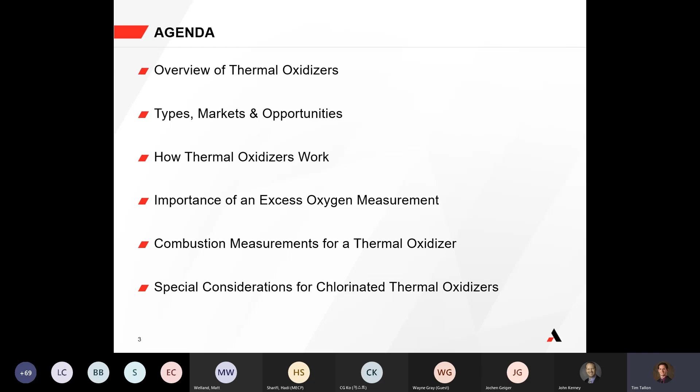Again, the focus of today's conversation will be reliable combustion control for thermal oxidizers. Let's talk a bit about the agenda for today. We'll talk about how thermal oxidizers work, how they're different than some other pieces of fired equipment you might be familiar with, and different markets that thermal oxidizers exist in. We'll also talk about the importance of the oxygen measurement, specifically the excess oxygen measurement - a pretty critical measurement for thermal oxidizers. We'll talk about relevant combustion measurements, and then some considerations around chlorinated applications.

So to start off, why do thermal oxidizers even exist? Well, they exist for the purpose of emission control, to reduce air pollution, by burning the volatile organic compounds (VOCs) or hazardous air pollutants (HAPs) in the waste stream. They do that specifically through some type of combustion or high temperature thermal oxidation process - hence the term thermal oxidation: high temperatures, and oxidation through reaction with oxygen.

Thermal oxidizers differ from the conventional term of incinerators because they're more specific. Thermal oxidizers burn only gases and liquids, whereas incinerators can burn solids and other types of solid waste. A thermal oxidizer is much more specially designed for these gases and liquids, which is why we're talking specifically about thermal oxidizers, as opposed to incinerators, which could burn anything and have any type of variable waste stream.

When we think about measurement objectives, it's always important to think about safety, so monitoring for safe and complete combustion. We want to make sure you're operating with complete combustion as opposed to unburnt waste or other forms of incomplete combustion. It's absolutely critical to have the correct air-fuel ratio, making sure you have enough air to fully oxidize any of the waste gas directed to the thermal oxidizer. Also, having sufficient oxygen is critical for high destruction removal efficiencies. We'll talk about DRE throughout this presentation, and we'll also cover this air to fuel ratio a couple of times during the presentation.

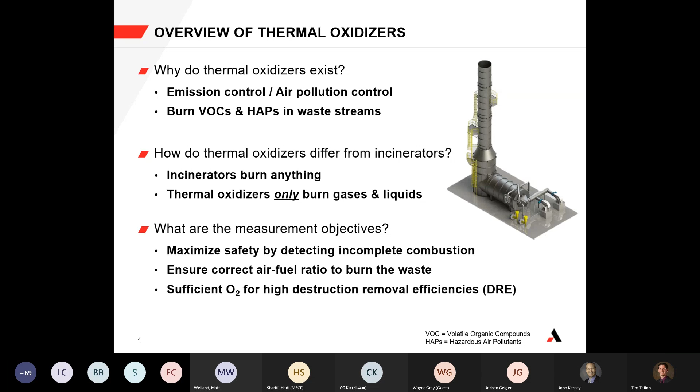We'll talk directly about that towards more the middle of this presentation.

Some of you may be very familiar with fired equipment, specifically fired heaters. Fired heaters have a very specific function, and thermal oxidizers have a very specific function, so let's talk about that. A fired heater is designed specifically to heat a process fluid. You have a whole bunch of tubes filled with some type of fluid that you want to heat up for later in your process. You'll most often see multiple burners firing natural gas, operating at relatively high temperatures, with a radiant section for the tubes to be heated from both the heat of the flame and the radiant light from the flame. There's some type of transition zone to the convective section, and then out to the stack. That's primarily a fired heater, purpose-designed around heating some type of process fluid.

Now, a thermal oxidizer, on the other hand, is designed...

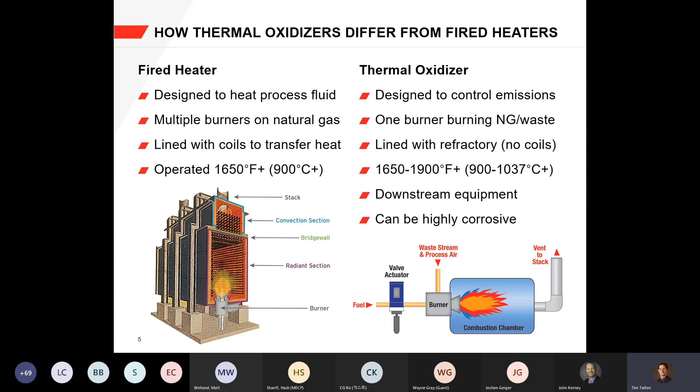Now, when we think about where thermal oxidizers exist, I want to be clear that they exist across industries. In a refinery there's gas thermal oxidizers, catalytic crackers, and a lot of different applications throughout chemical plants. Anything that has a waste gas byproduct, whether that be a vent stream, a chlorinated hydrocarbon waste stream, a nitrogen-bearing compound, or even wastewater like acrylonitrile, all of those different types of waste streams can be directed to a thermal oxidizer to thermally oxidize and eliminate the waste compounds before going to atmosphere.

The whole purpose of a thermal oxidizer is to eliminate hazardous waste through incineration and thermal oxidation, and you'll see that throughout the chemical industry. But in addition, you also see it in pulp and paper mills through non-condensable gas emissions, asphalt plants, landfill gas, carbon black production, and pharmaceuticals. So think about where your process might have some type of waste stream, and chances are it may very likely be incinerated, especially if it's high concentrations. It may be thermally oxidized through a thermal oxidizer. So a lot of applications across industries.

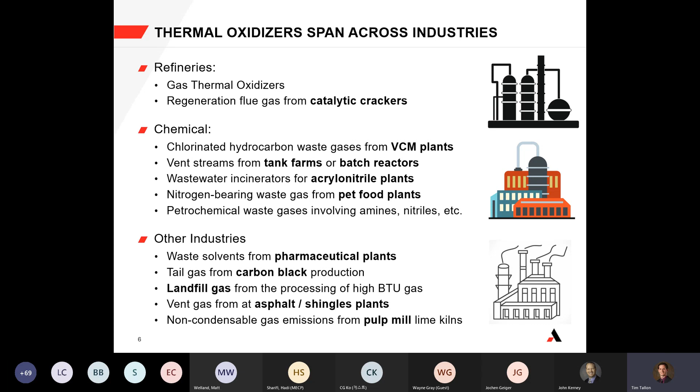Now I want to take a moment to talk about the waste gas itself, because the waste gas drives much of the design of the thermal oxidizer. In a general sense, there are two scenarios: there's the contaminated air scenario, and then there's a highly more combustible waste stream compound process stream.

For contaminated air, it has trace amounts of contaminants. The airstream itself may not be combustible or have any type of combustible value, primarily inert, and it most likely has sufficient oxygen to mix with the waste gas compounds for oxidation. So typically a contaminated airstream does not require an oxygen measurement if it has high enough oxygen concentration. If it's just generally air, 21% oxygen, those types of devices don't necessarily need an oxygen measurement because they have such high amounts of oxygen in that process stream.

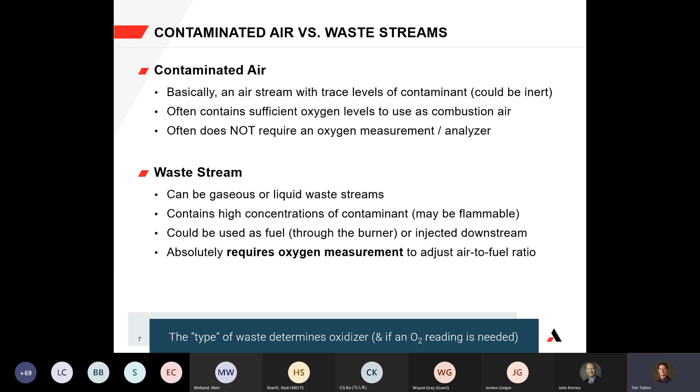But for a standard waste gas stream, whether gaseous or liquid, you could potentially have very high concentrations of contaminant, so much so that it could actually be flammable. In those cases, if it is flammable, you could use it as fuel and inject it through the burner for the initial injection into the combustion chamber. Or if it's more inert, you can also inject it downstream through a separate nozzle. But in those cases, you would absolutely require an oxygen measurement so that you can control the proper air to fuel ratio at the burner and with secondary air, which we'll talk about more. It really depends on the type of waste you're looking to thermally oxidize in order to have the right design to meet that waste removal.

Now, if we talk about contaminated airstreams, generally there are two different types of thermal oxidizers. There's a couple of exceptions, there could be more, but generally what you'll see for a vast majority of contaminated air applications is a regenerative thermal oxidizer. Generally in these cases, you could have 2 media beds, up to 3 media beds, or even more. But basically it has a special valve configuration that alternates where the waste gas is injected.

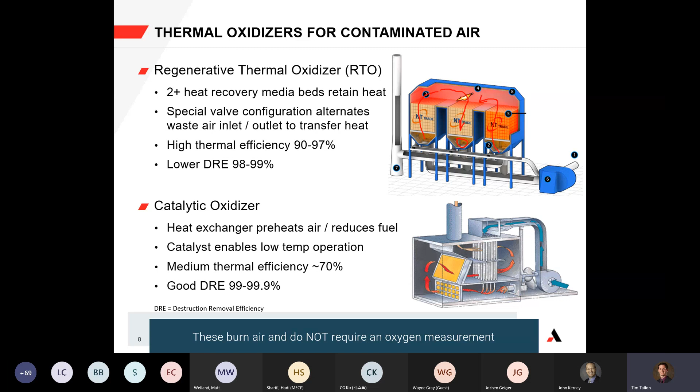Now, where we're going to spend most of the focus of today's presentation is around direct fired and recuperative thermal oxidizers. The thing about them is they can be in many different configurations - single stage, multi-stage, depending on what the design is. Designs for lower NOx, designed for different waste streams.

You can introduce the waste gas through the burner or downstream through a nozzle like I talked about before. Basically, it's able to handle waste liquids, waste gases, and they're highly customized. When I used to design thermal oxidizers, they were very highly customized depending on the size and volume of waste gas, the components in it, and very high destruction removal efficiencies. I mean, we're talking 99.99% destruction removal efficiencies.

So we call that 4 nines destruction, very high destruction removal efficiency. And then with a recuperative thermal oxidizer, it's the same as direct fired, except it includes some type of heat recovery. Now that could be - we'll talk about that later as well - but that could be a boiler, that could be a waste heat exchanger, it really depends on what you're trying to achieve.

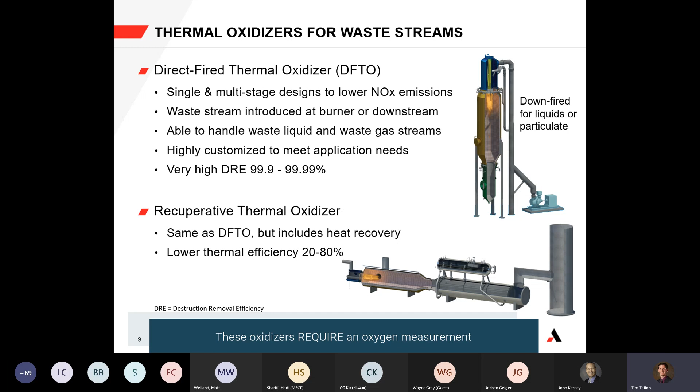But let's talk about some of the primary elements of a thermal oxidizer. Every thermal oxidizer should have these components, especially the direct fired ones. So everyone will have a burner of some sort, and that burner can fire fuel, and if the waste gas is combustible enough, it can go through the burner as well.

The burner can be fired horizontally. In both of these cases it's fired horizontally, but it can also be vertically up-fired, vertically down-fired. It really depends on what you're trying to incinerate.

You could also, depending on the waste gas, inject downstream as well. So it's very possible to inject waste downstream, depending on the waste compound itself.

You also have a combustion chamber. That combustion chamber operates hot, so 1600 degrees Fahrenheit or more, 900 degrees Celsius or higher. And then you also have an oxygen measurement towards the outlet of the combustion chamber, as well as a thermocouple.

These are absolutely critical for control. We'll talk about this later, but you'll have them right towards the outlet of the oxidizer chamber, just to make sure that you have sufficient oxygen to control your air inlets.

You also have some type of PLC or burner management system to control the burner and the air-to-fuel ratios, and then also a fuel skid to control the fuel before you go into the oxidizer. So some type of control valve scenario, a fuel skid, and then some type of stack. That's the general overview of the elements of a thermal oxidizer, just at the bare minimum.

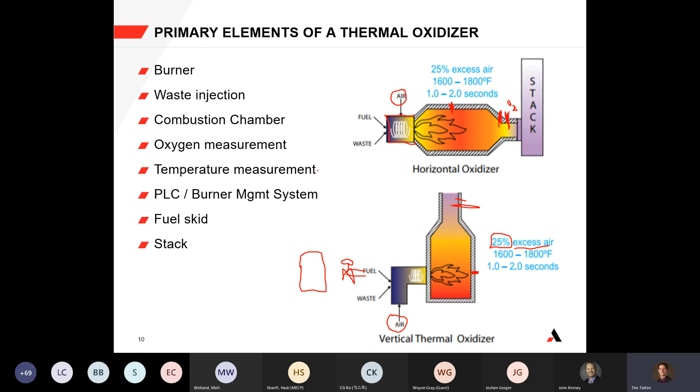One thing I want to make clear is that being that thermal oxidizers are so customized to the application, your application may have very specific elements added to it. So if you have a nitrogen-bearing compound, you could have a reducing chamber, which I'll show you in a future slide, in order to remove nitrogen-bearing compounds.

If your burner is generally above 10 million BTUs per hour, you would also consider some type of waste heat boiler for heat recovery. Alternatively, you could consider a heat exchanger depending on whether or not it makes sense to preheat your waste gas, and if that impacts your oxidizer, you'd have to consider that. There's also the option for heat exchangers for heat recovery, or flue gas recirculation for cooling the air, for additional options for cooling the flame and lowering NOx.

Depending on the size of your thermal oxidizer, you may also consider an induced draft air fan. There may also be one at the outlet, to pull the full suction of the products through to the stack. So you might also have an induced draft air fan right before the stack, to pull all the products of combustion through the equipment before it goes to the stack.

And if you have particulate or chlorinated compounds, you might need additional equipment. Say you have chlorine or sulfurs, you might have a spray dryer absorber or a scrubber mist eliminator. If you have some type of particulate, you might consider an electrostatic precipitator or baghouse. And if NOx is a concern downstream, you might also have SNCR, selective non-catalytic reduction, or selective catalytic reduction at the back end. So different ways to approach a thermal oxidizer, a lot of application-specific elements to consider.

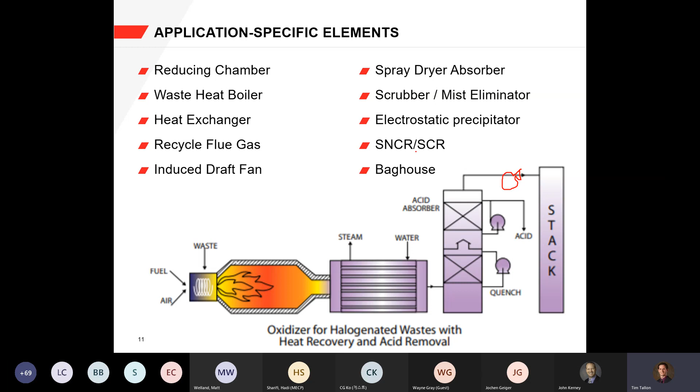Now, a thermal oxidizer operates on what we call the 3 T's of oxidation. Obviously the objective of a thermal oxidizer is to fully remove, eliminate, and destroy the waste gases and waste compounds in the waste stream. So in order to do that, you need the 3 T's of oxidation: temperature, time, and turbulence.

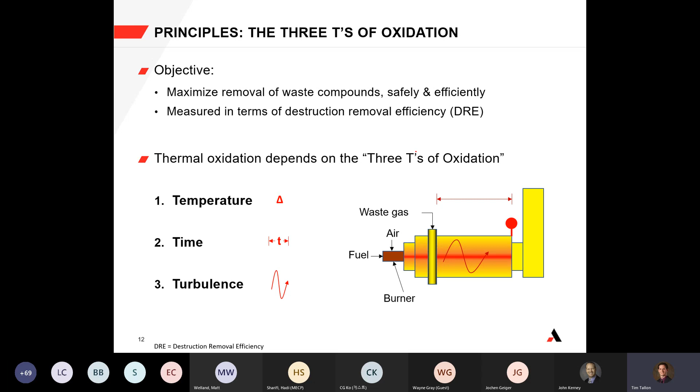Let's go into that. For temperature, you need to make sure that you'll have a combustion chamber that operates typically between 1650 degrees Fahrenheit, 900 degrees Celsius, or higher, in order to operate in hot enough conditions. But that hot condition is dependent directly on the auto ignition temperatures of the constituents and compounds within the waste stream.

So your combustion chamber temperature is dictated by the auto ignition temperature. That's the first T: you need to have sufficient temperature to fully unlock that auto ignition temperature reaction. That's the first thing, auto ignition.

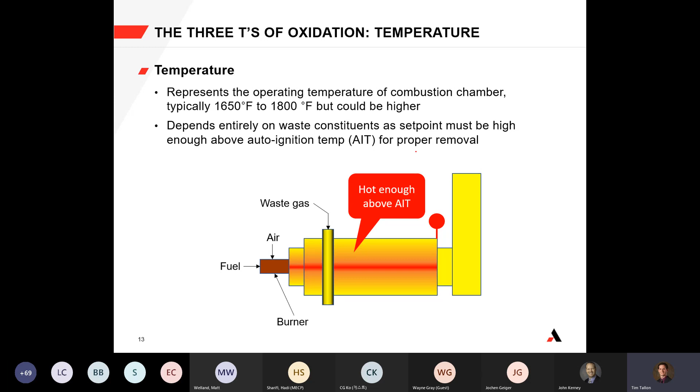Now the second thing, time. When I say time, you need sufficient volume of chamber in order to fully oxidize the waste compounds. This could be half a second. Generally it's about 1 second residence time for destruction, but that's a general rule of thumb. You need sufficient residence time for those compounds at high enough temperature in order to fully oxidize them. So generally, the longer the chamber, the higher destruction removal efficiency you'll have. That's the second T, residence time.

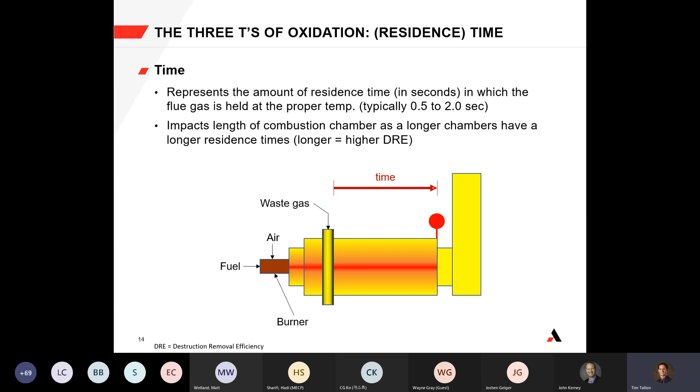And the last of the 3 T's of oxidation is turbulence. Turbulence specifically refers to the mixing and velocities within the combustion chamber, and ultimately turbulence with oxygen. It's 100% critical to have sufficient oxygen mixed with the waste gas at high temperature with enough time in order to fully oxidize it. So it is absolutely important to have sufficient oxygen with proper mixing within the chamber. That mixing can be achieved by the spin of the burner flame or the injection of the waste gas. A lot of different special items there.

So we should call it the 3 T's with O2, as you say. Typically we talk about the 3 T's, but you are absolutely right - we have to call it the 3 T's plus the O, or whatever we want to call it. That's a good point. They call it the 3 T's of oxidation, but you need oxygen too.

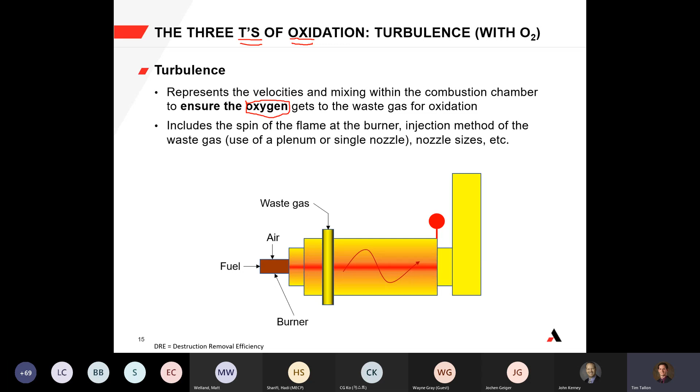Yeah, the oxidation part, and it's different from burner to burner also about the turbulence. Turbulence is something you can't measure - it comes in from design. All 3 T's come in from design. Only the oxygen and the temperature are something you measure, but only the oxygen is the one you can control. So we want to emphasize on the O2. It's absolutely critical - if you have all 3 T's without oxygen, you wouldn't get full oxidation. You might have some other concerns. But great point there.

Now for basic operation, we'll go through this very briefly. When you think about the basic operation, a simple thermal oxidizer would have some type of burner flame. It could have a flame tip where the flame is anchored, or it could have a refractory baffle that the flame sits on. But in either case, there's a flame - that's part of the thermal oxidation process.

With that, you have to introduce waste in some way, shape, or form. The waste can be injected through the burner if it is flammable, or if it's inert, it could be injected through a nozzle separately. So in this case it could be injected through a nozzle, designed properly with sufficient turbulence to interact with the flame.

But once you have that, you may need additional air, because you can't put all of your air through the burner in some cases. So you might need additional secondary air to achieve a 2 to 3% excess oxygen level. And obviously you also need some type of thermocouple at the end to measure, to make sure you have proper temperature within your combustion chamber. So the excess oxygen measurement adjusts your secondary air, which we'll talk about later. And then you operate sufficiently at high enough temperatures within your combustion chamber before it vents out to atmosphere. Just like we talked about, the 3 T's of oxidation. And then again, you may need additional equipment.

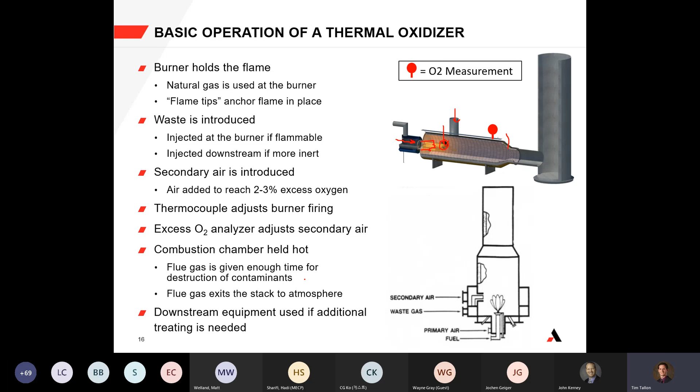So let's talk a little bit about a multi-stage thermal oxidizer. I won't go into too much detail, but I do want to make it clear that a multi-stage thermal oxidizer would be used if you have nitrogen-bearing compounds - say you're burning amines, for example, or some type of acrylonitrile. It really depends, a lot of different types of applications. In those cases, you operate fuel-rich and substoichiometrically, starving the flame of oxygen, generally 70 to 90% stoichiometry, at very high temperatures, 2000 to 2400 degrees Fahrenheit, for 1 to 2 seconds residence time.

And with that, the burner is designed specifically for this reducing environment. The chamber is designed for these extremely high temperatures. What you're doing in this reducing chamber is turning those nitrogen-bearing compounds, starving it of oxygen, so that any nitrogen present forms the diatomic nitrogen molecule as opposed to NOx. So the whole point of a reducing chamber is this diatomic nitrogen. Now, in a multi-stage thermal oxidizer, you would also need some type of quench section, because you can't just emit this reducing gas to our atmosphere - you need to do something else with it.

So generally, it's followed by a quench section, where you would add additional air and additional water, especially if there's a high reaction after the oxidation air. You want to avoid creating additional hotspots so that you don't recreate NOx. In either case, you add air, potentially additional water, and then you have your oxidizing chamber. This is the exact oxidizing chamber we were talking about before, where you control it at high temperature so that you can thermally oxidize the remaining waste gas before it goes through the rest of the system and out the stack.

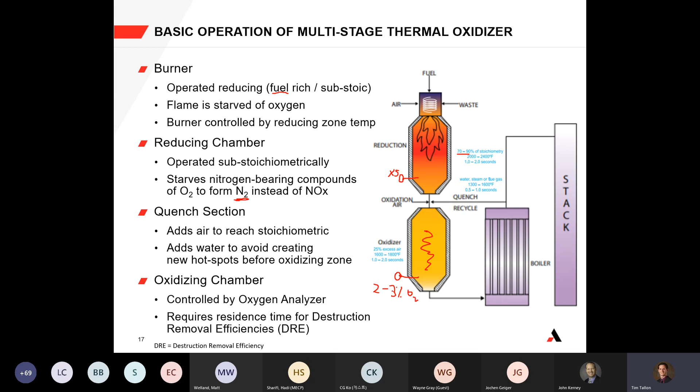So like we were talking about before, the downstream equipment can tell you a lot, and in particular, if you have chlorine, for example, you would need some type of spray dryer absorber or some type of Venturi scrubber like you see here, or some type of packed tower. All of those are different ways that you could handle corrosives like chlorine or sulfur. If you have particulate, you may need a baghouse of some sort with dropout zones and dust collectors to accumulate that particulate before going to atmosphere. You may also need an electrostatic precipitator or a cyclonic separator like you can see here, depending on what else is in your waste stream.

You could also consider high pressure thermal oxidizers, which are not very typical, but in those cases they would have some type of pressure vessel design. A typical thermal oxidizer does not see high pressures because it ultimately vents to atmosphere. That being said, you can also have other designs, like we saw some examples where the waste was fired downward. Waste liquids and waste water would both be vertically down fired. Even in some cases, if it had particulate, it could also be vertically down fired, so it could all accumulate at the bottom through a dust collector or dropout zone.

And then finally, you could also consider different designs, whether you have nitrogen-bearing compounds, whether that be a multi-stage oxidizer or selective catalytic reduction or selective non-catalytic reduction. But the downstream equipment can really tell you a lot about what's in your process and what's being incinerated.

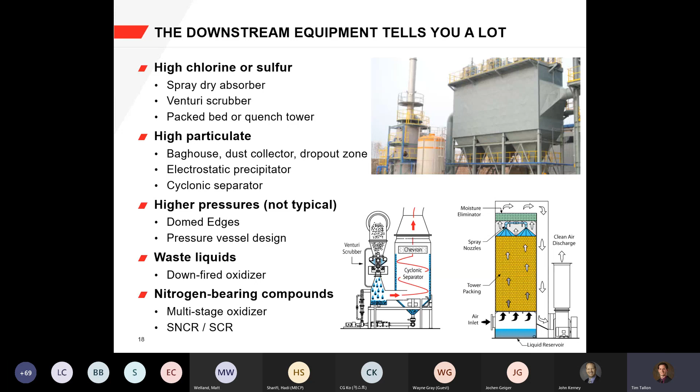Now, we talked a little bit about this, and I know there were some questions already about the excess oxygen measurement. But this is a really rough piping and instrumentation diagram on a thermal oxidizer. Very rough. I made it myself.

So if you think about it, your waste gas is either introduced through the burner or downstream. You have your flame here, but how do you control it? Your thermocouple controls the fuel gas, the fuel control valve - the fuel that goes to the burner tells you how much additional fuel you're going to add. That's all dictated by the temperature. So if the temperature decreases, you'll increase your burner. You'll open your fuel control valve, and that'll introduce to the chamber, so that you get back up to temperature. If it's too high of temperature, you obviously cut back on your fuel control valve.

But when you think about the excess oxygen measurement, that actually controls your secondary air. You want to make sure that you have enough air and oxygen present so that you have 2 to 3% excess on the outlet. In most cases you can't put all the air through the burner, so the only way you can really do that is by having an additional secondary airstream - the primary being the one going to the burner, the secondary being injected downstream. This air ultimately is controlled by the oxygen measurement. So if you're getting too low of oxygen, excess oxygen level, you will open up that valve, increase the burner, increase the blower capacity, and put more air into the system so that you have sufficient air. So it's very important to have this excess oxygen measurement.

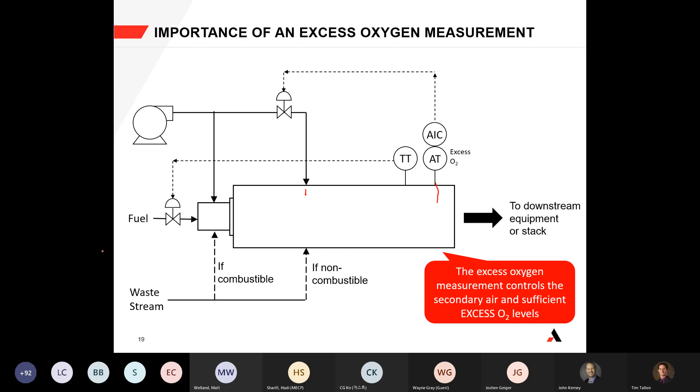Thank you, Jochen. Yeah, that's why I'm stressing the importance of the excess oxygen measurement, because the only way you can really straightforwardly correlate to the air to fuel ratio is through this excess oxygen measurement.

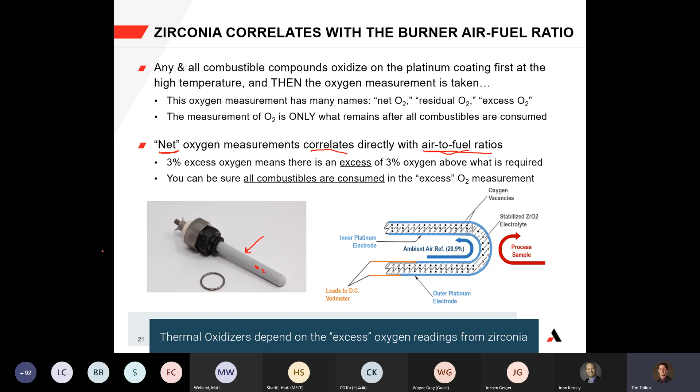Good point. And as far as it comes to a thermal oxidizer, considerations around a thermal oxidizer are that it can have very variable waste composition. It can have massive fluctuations. In some cases it can go from partially flammable to extremely flammable. It could have changes in composition from different compounds, concentrations. There's a lot of different fluctuations a thermal oxidizer can see.

So the ability to very quickly detect low excess oxygen levels is important so that you can quickly respond and adjust that secondary air connection. Ultimately, the destruction removal efficiency depends on the excess oxygen level. The only way you can have proper destruction removal, 99% removal of the waste gas, is through the 2 to 3% excess oxygen with that time, temperature, and turbulence.

And again, because of a key point you just made, Tim, it's another point for zirconia. It has unbelievable flexibility when composition changes. On optical systems, you have to somehow adjust your system for the composition. On extractive systems, you have to modify your sampling system depending on the composition, depending on the state of your sample. With zirconia, it's a kind of in situ measurement. We call it close coupled extractive, but it works under all the different working conditions of the oxidizer, of the reducing chamber. So it offers wide flexibility, especially for this application.

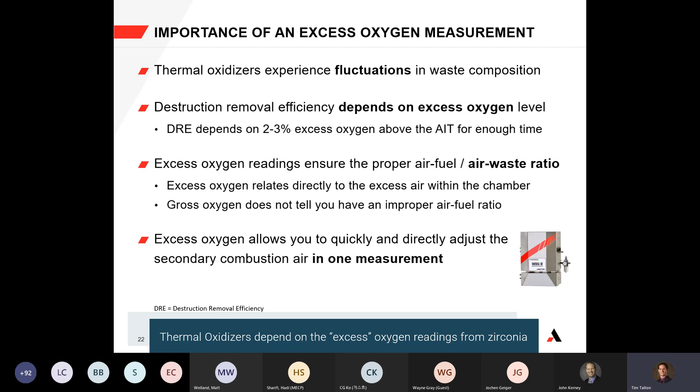Thank you, Jochen. So that flexibility really plays into the fact that it allows you to control your secondary combustion air with just one measurement, the excess oxygen measurement. So with that, where would you install it? I know we talked a little about the reducing chamber with an excess fuel design of a zirconia analyzer, but really, if you're thinking about the oxidizing chamber, you would locate that downstream, right at the outlet of the combustion chamber. And again, why do you do that? The whole purpose is to monitor the excess oxygen level to control your secondary air.

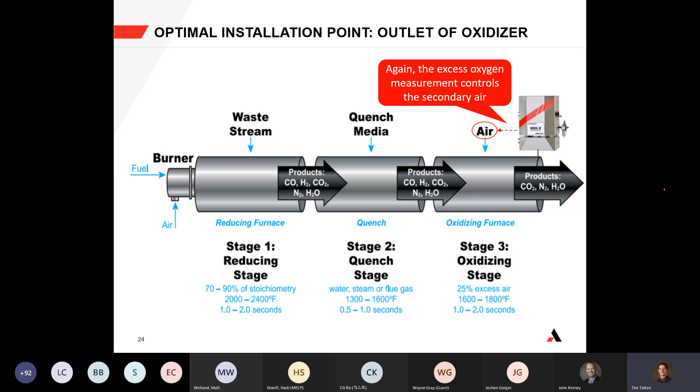When you think about the measurements for a thermal oxidizer, it's absolutely critical to measure excess oxygen for the secondary air control. That relates to your air to fuel, air to waste ratios, making sure you have sufficient air oxygen present for full destruction removal efficiency, and also responding to any unburnt waste. It's very important that you have the ability to detect unburnt waste, and that's why it's an excess reading, because it's detecting the oxygen after everything else is consumed. So that's just something to point out.

My most favorite topic, combustible detector. Let's not confuse this, and as I mentioned earlier, we will do a separate seminar for that. Combustible is something different than CO. CO measures CO, combustibles measures combustibles. And combustibles is CO plus hydrogen. CO is only CO. I can't repeat that often enough, so be sure we'll do something separate for that.

Right. So I know we haven't talked about it directly in this presentation as part of a combustibles detector, but a combustibles detector could allow you additional monitoring for combustible breakthroughs. Like Jochen pointed out, we can certainly talk about that in the next presentation. But for this, I want to make it clear, for reliable control, you absolutely need to think about how you measure that oxygen. As far as combustible detection, combustibles provide you additional information if you start to get a low oxygen reading. Combustibles can tell you well, is that because of incomplete combustion, and what are your operating limits?

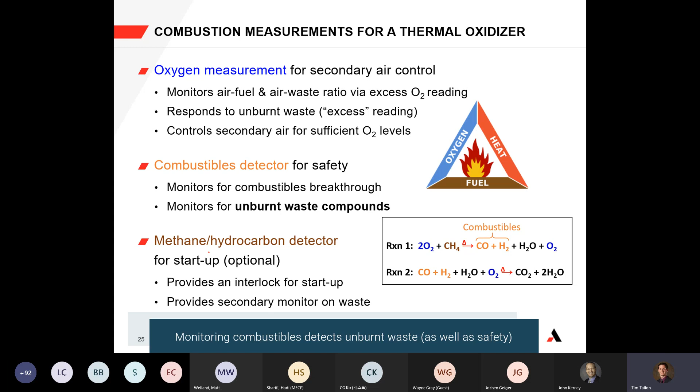For highly corrosive applications, you need to think about the analyzer as well. We had a customer in the past in a chemical plant manufacturing chlorine and chlorinated compounds like PVC and vinyl chloride monomer. They had a situation where the thermal oxidizers they were receiving were designed with less expensive 316 stainless steel versions of the combustion analyzer in this highly corrosive application. What they were seeing was that hydrochloric acid from the process and from the products of combustion were attacking the wetted parts of the oxygen analyzer, inevitably causing leaks, which are hard to find within the analyzer tubing, ultimately causing concerns with reliability and safety.

Our specific customer had to replace their stainless steel analyzer every 6 months. It wasn't until we got hold of this information that we worked together with them and identified a Hastelloy C option. Many years ago we had the Thermox WDG-IV flue gas analyzer, and we created a special version with Hastelloy C internals that was beneficial for them. It had a longer life, was much more reliable with much less maintenance, and ultimately that chemical plant standardized on this unit, helping them stay compliant and reliable.

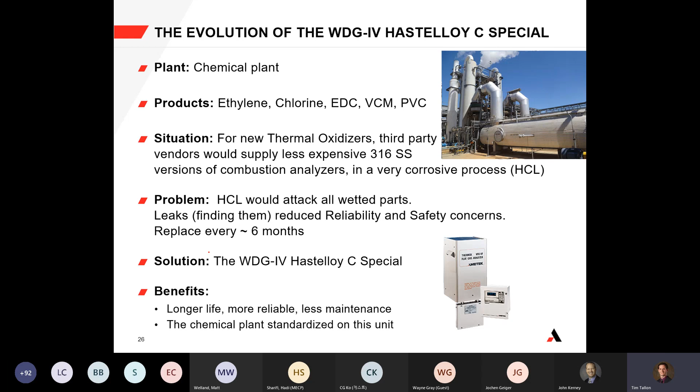We have more recently adapted this technology, applying lessons learned from the WDG-IV Hastelloy C special, to a WDG-V Hastelloy C option. It's a suitable design from all those lessons learned, which includes Hastelloy C wetted parts, flame arresters, a chlorine-resistant zirconia oxide cell to ensure proper life, plus a check valve to make sure gas doesn't go in the wrong direction on the cal gas line. Same with the Hastelloy C calibration gas—a lot of considerations around the calibration line to ensure high integrity.

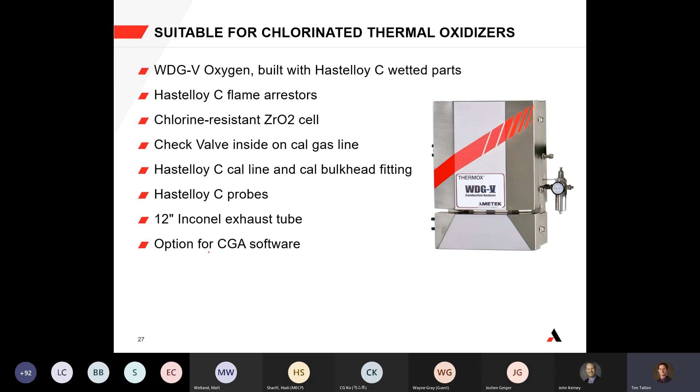We also have Hastelloy C probes and an option for cylinder gas audit software, which we'll talk about in a second. I want you to be aware that if you have a highly chlorinated thermal oxidizer application, you should consider what analyzer you're using for your excess oxygen measurement, because it should absolutely have additional reliability and consideration for Hastelloy C to handle those highly chlorinated applications. Something to think about.

We also offer a special new option for USA specifically on cylinder gas audit software, allowing you to automate some of the CEMS monitoring systems for your thermal oxidizer—taking that thermal oxidizer application and any CEMS requirements on continuous emission monitoring and allowing much more tailored design, so you can use the WDG-V with its CGA software to automate your cylinder gas audit processes. Something to think about, especially if you've discussed RATA in the past or have those concerns.

And obviously, this would ultimately allow you to automate your process within the analyzer, so you don't have to buy a digital PLC or something like that. That ideally saves you additional money for building.

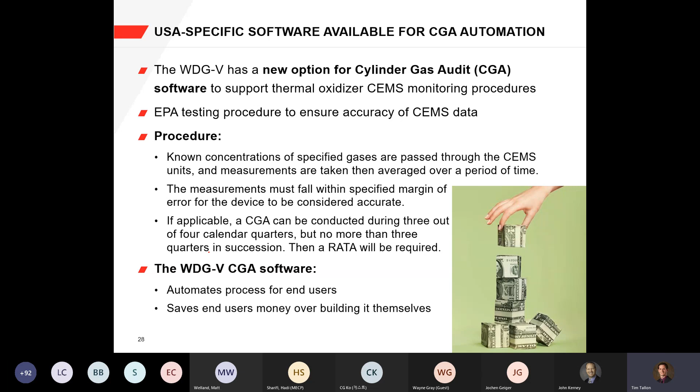So that being said, the major takeaways for any thermal oxidizer is to realize that they're not like a fired heater. They burn chemical waste specifically to eliminate them before any of that flue gas is sent out to atmosphere. It's pretty critical that you think about what you're burning, whether it's air versus waste, because that absolutely changes the design of the thermal oxidizer. So any thermal oxidizer vendor would need to know that.

And more than that, you want to be mindful that if it's not an airstream, you would want to consider your excess oxygen measurement and any type of analyzer that would require additional measurements we talked about as well. But primarily, these thermal oxidizers require the 3 T's of oxidation: time, temperature, and turbulence, at sufficient oxygen levels for full destruction and removal of contaminants.

And you want to think about the downstream equipment you'll come across, especially if it has certain waste compounds or high enough heating value for waste heat recovery. And then finally, excess oxygen levels control that secondary air. That's absolutely critical—that excess oxygen measurement allows you to have the correct air-to-fuel and air-to-waste ratios so that everything is fully oxidized and you can control that secondary air level accurately.

And then finally, you want to make sure that you have proper considerations for chlorinated applications, corrosive applications, and like we talked about with the Hastelloy C internals.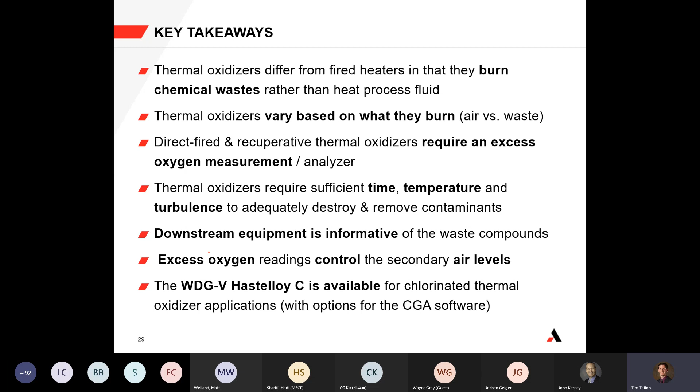Yeah, I think I have answered some of the questions already in the chat window while you were talking. Of course, there's always some very specific questions, and Tim and my colleagues will get back to you individually and have a separate discussion for more detail, as we can only go so in-depth in a limited amount of time. So yeah, thanks for going through the chat.

Thanks for listening. So, any other questions that you identified or things that you want to point out? No, there's a number of questions, as Jochen just mentioned in the chat. Some are fairly specific, so I agree with Jochen—we have the contact information for those that asked, so we can reach out to them directly and have more detailed discussions around that.

Tim, there was a question just around the components, mainly the analyzers and their certification for hazardous environments. I know we have a wide array of combustion analyzers, but I don't know if you just want to touch generally on that, perhaps in the few minutes we have left.

Yeah, I see that in the chat on hazardous area certification. The short answer is it really depends on the application. I can think of examples where general purpose was suitable, and examples where it required hazardous area class 1 div 2. So whether that be zone 2 in ATEX or IECEx, or class 1 div 2, it really depends on the application and what's really around the thermal oxidizer. That's more what it is than anything else—what's around it that would classify it as class 1 div 2 or something else.